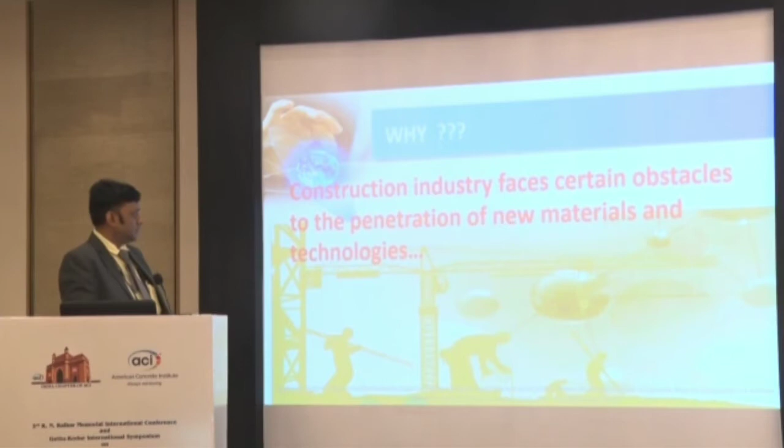This is why the construction industry faces certain obstacles to the penetration of new materials and technologies. We are finding India is 10 to 15 years lagging in utilizing advancements in concrete technology. And as the days go on, this 15 years is increasing to 20 years, 25 years.

This is a conclusion of this paper: construction works are long-term processes involving high investments accompanied by unavoidable risks inherent to research. So construction companies tend to be reluctant to use advanced materials that are not specifically listed in the official construction codes. I think we need to deal with this.

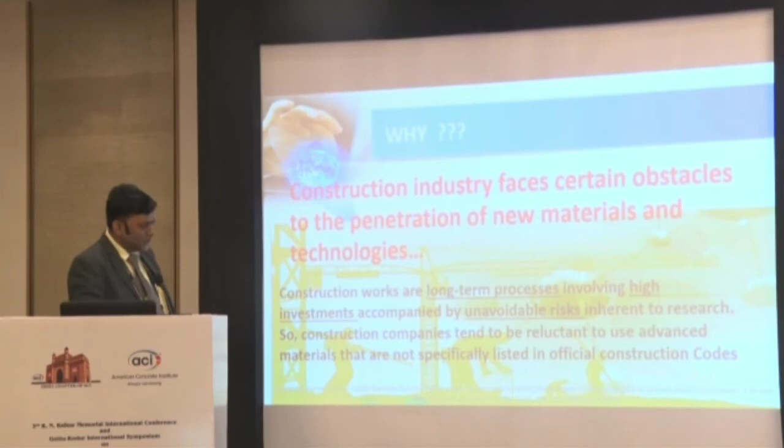Introduction: till 1930, additives were frowned or scorned upon, though many recommended it. Admixtures were developed in Japan and Germany in 1970. In India, we introduced admixtures in 1985. See the time lag.

The most significant trend of development - this is a paper of Dr. Anjan Chatterjee. OPC was there, then came blended cements like PPC, PSC, PLC, then came composite cements, and now we are in this position. Nano cement is not far behind, as stressed by some previous authors.

Scopus publications - see, it's not very legible, but it's increasing. The nanomaterial, nanotechnology and cement publications in Scopus are increasing.

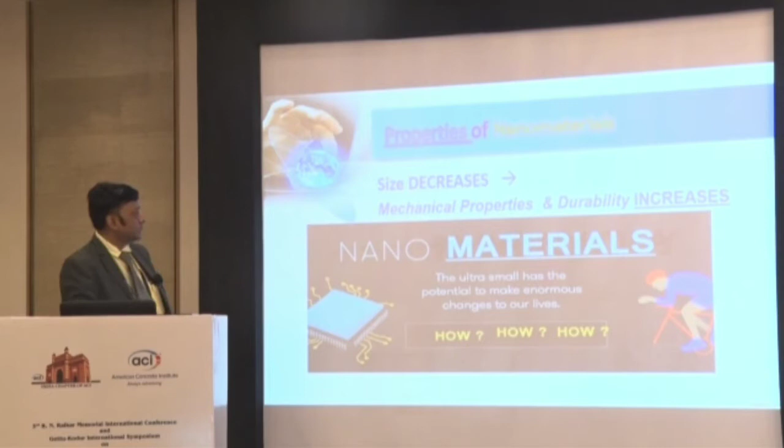As size decreases, mechanical properties and durability increase for nanomaterial properties. The ultra small has the potential to make enormous changes. How?

These nanomaterials at the nanoscale level bring different laws of physics into play - there are quantum laws of physics at play, not the Newtonian physics.

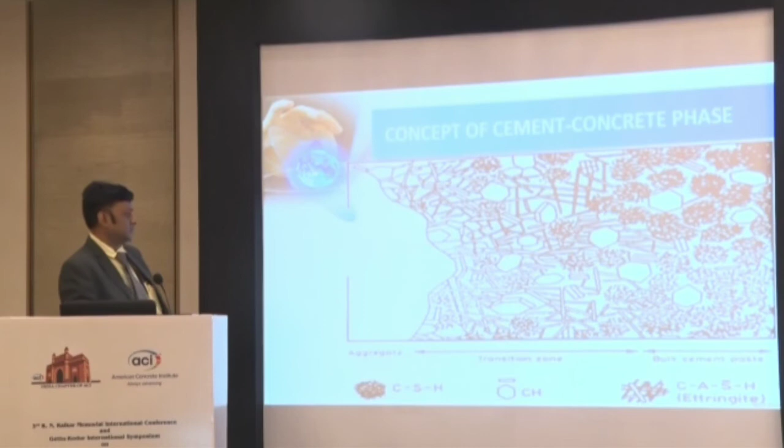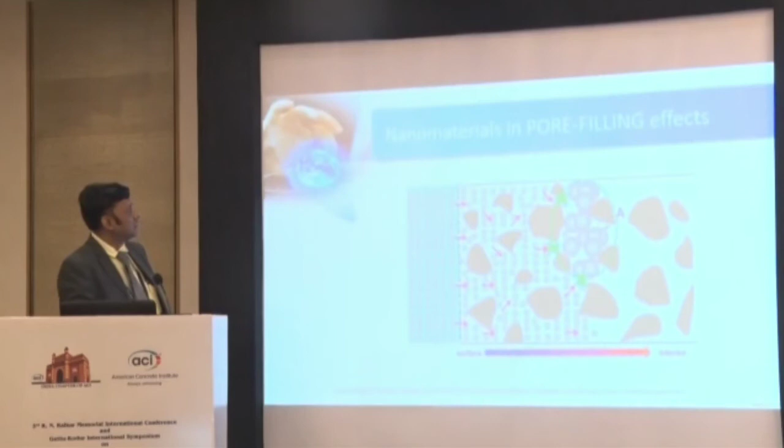This is the concept of classical cement structure: aggregates, transition zone, and cement paste. So at the nano level, nanomaterials help in pore filling and nucleation effects. This is a crack bridging mechanism.

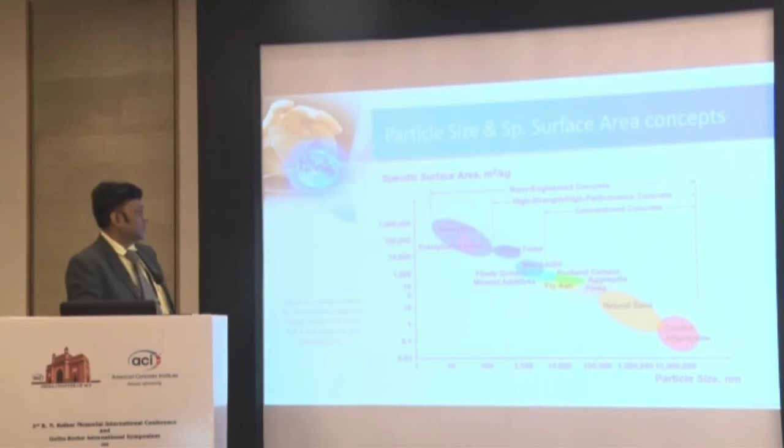So for nano-engineered concrete, we get higher strength. These are literature reviews of high performance concrete compared to conventional concrete.

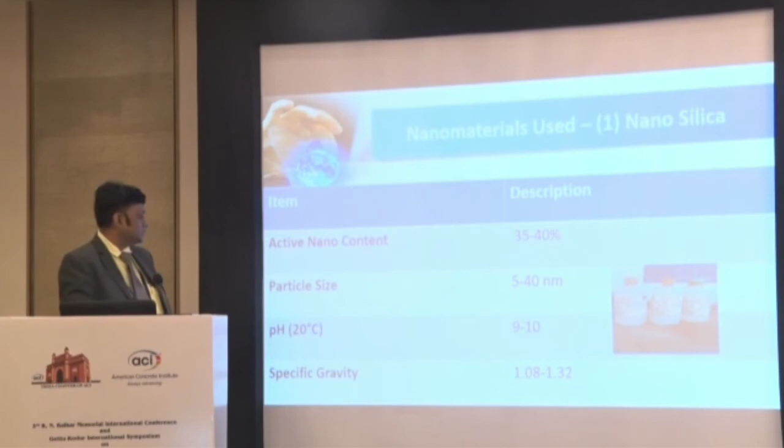I have used nanosilica from Bee Chems, 5 to 40 nanometer particle size, with this pH. I have also used carbon nanotubes from Nanoshell company, 25 to 45 nanometer length and 20 to 40 nanometer diameter.

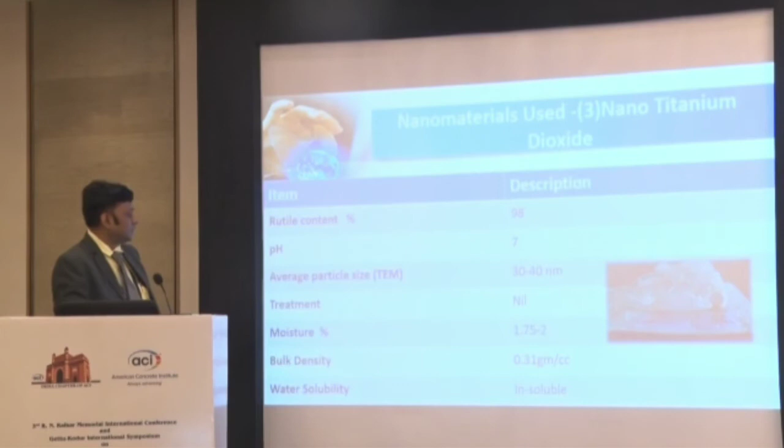These go into further details. Nano titanium from Kerala Minerals and Metals, 30 to 40 nanometer particle size. Now the physical, mineralogical, morphological study.

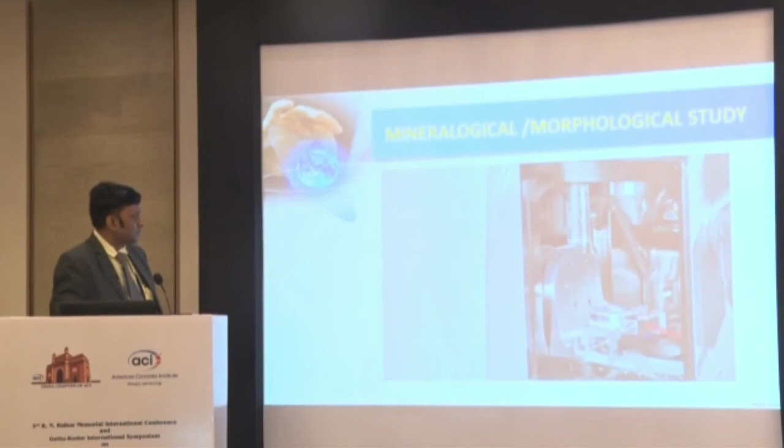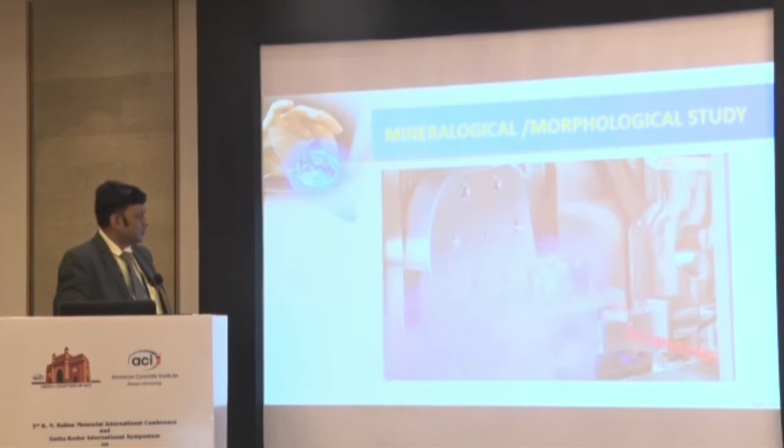This sir spoke about in the morning - I have the XRD part. The powdered nanosilica, nanotitanium dioxide, or carbon nanotube.

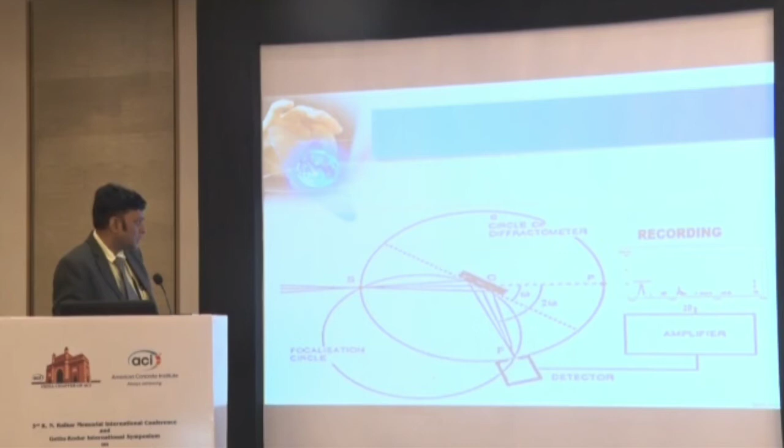Nanosilica I got in colloidal form, and I used an oven to make it into powder. The diffraction XRD for nanosilica, nanotitanium dioxide, and carbon nanotube - this is the diffraction pattern I am getting.

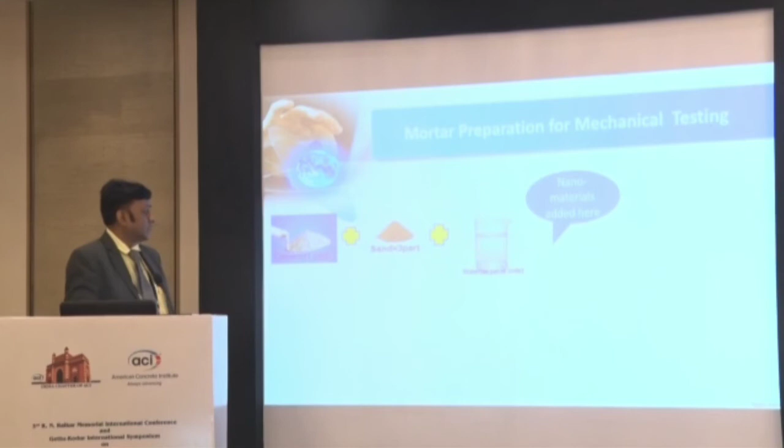For mortar preparation for mechanical testing: cement one part, sand three parts as per IS codes, plus water as per IS codes, and nanomaterials added at this time. It cannot be dissolved in water, so I added it in a different fashion - I am going to show you that.

We prepared the mortar, cured it, and tested it in the lab. Now how do nanomaterials work? Nanomaterials are like jute-like fibers entangled, which cannot be dispersed due to van der Waals force. But this is not for nanosilica - I got that as a colloidal liquid form.

We are adding PC fourth generation admixture to get workability and for nucleation. We used an external ultrasonicator to get this result.

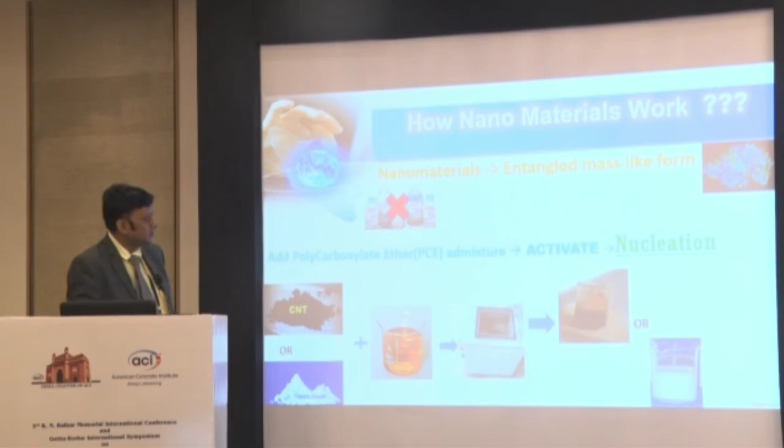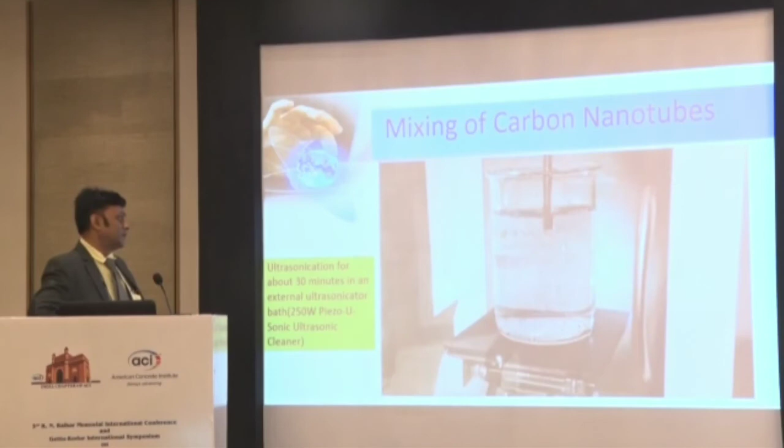Now this is a video showing how CNT does not dissolve in water. People get a problem here - they think adding CNT to cement will give you strength, or adding titanium dioxide to cement, or adding nanosilica in powder form, but this is a great problem.

So we used ultrasonication for 30 minutes in an external ultrasonicator in our IIST lab, a 250 watt piezo U-sonic ultrasonic cleaner. This helps in breaking the bonds by ultrasonic energy, external, not internal.

See how it dissolves.

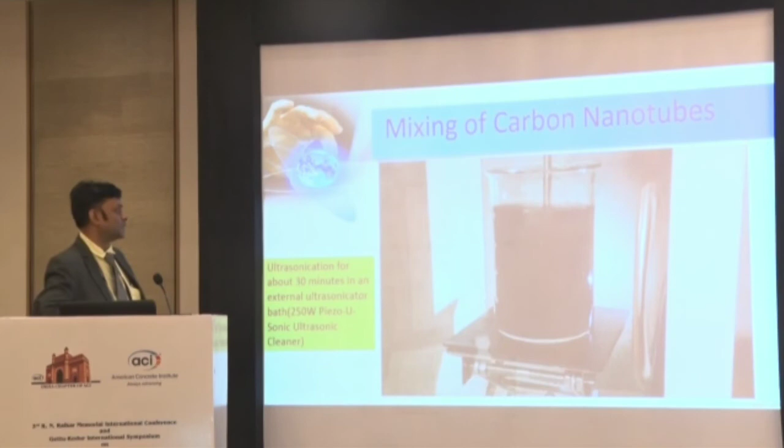It really helps in getting things done, in the learning process. Learning and application - mechanical testing of cement mortar samples. I've tested lab pictures, checked results. Now optimization of nanomaterials: what is the exact dosage of nanomaterials which gives you strength as per IS codes, at 28 days?

This is my control sample, this is my nanosilica addition, this is my carbon nanotube addition, and this is my nano titanium dioxide addition. See the increase in strength from the control sample to the carbon nanotube sample - that is the maximum increase. So we are saying this is optimized.

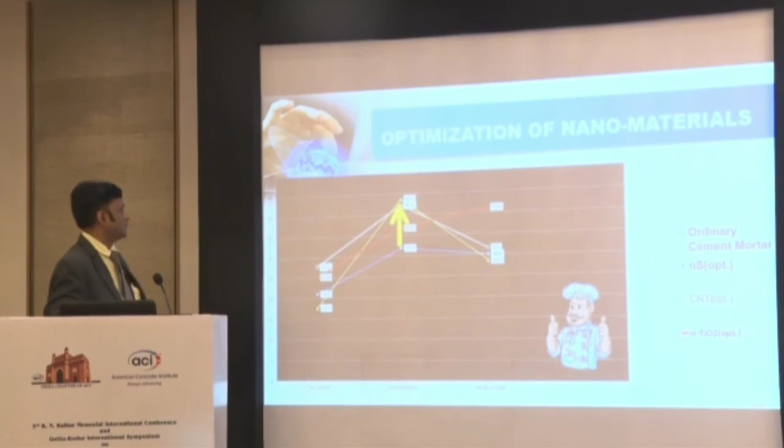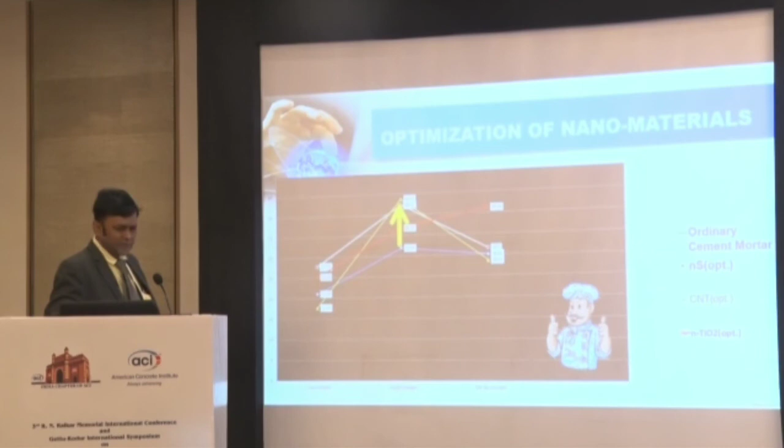I have got optimization at nanosilica 0.75% with respect to cement, carbon nanotubes at 0.02% with respect to cement, and nano titanium dioxide at 1% with respect to cement. These are verified by many literature reviews and authors, but there is also wide variation in optimizing dosages.

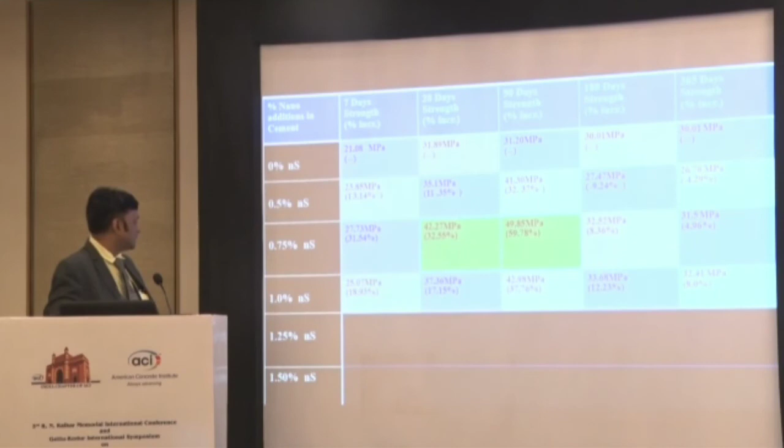These are my results for 0%, 0.5% nanosilica, 0.75% nanosilica, 1%, 1.25%, 1.5%. At 28 days I am getting a 32.55% increase - that is my optimization.

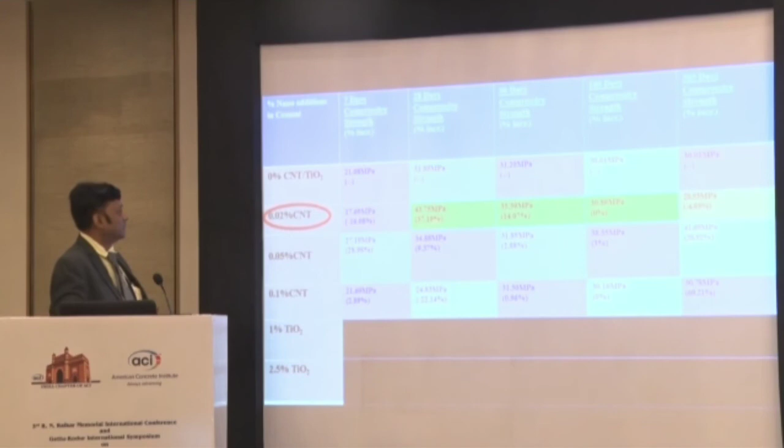For carbon nanotube: 0%, 0.2%, 0.02%, 0.05%, 0.1%. I am getting the optimization of 37.1% at 28 days. In the long term, of course, it varies, but that is not our topic today.

For TiO2: 1%, 2.5%. At 28 days, at 1% I am getting 12.6% as my maximum. So that is optimized.

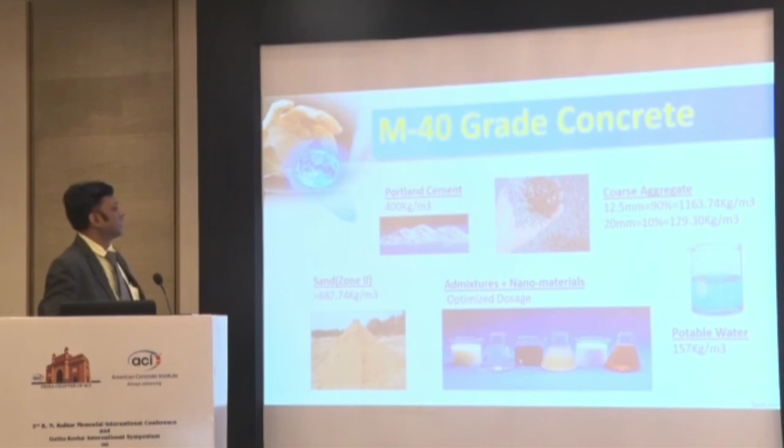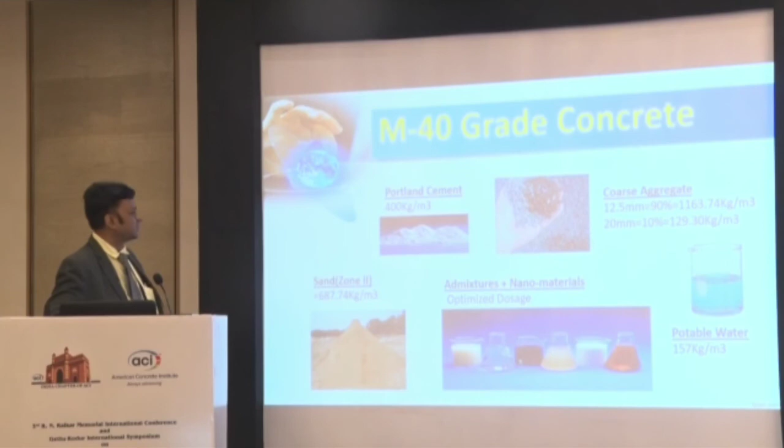Now I repeated this optimization from mortar to concrete, M40 concrete, using IS 10262. My water cement ratio kept fixed at 0.4, sand zone 2, coarse aggregate 90% and 10%, Portland cement 400 kg per meter cube, potable water as per mix design. I have got these results, so we will not go into details.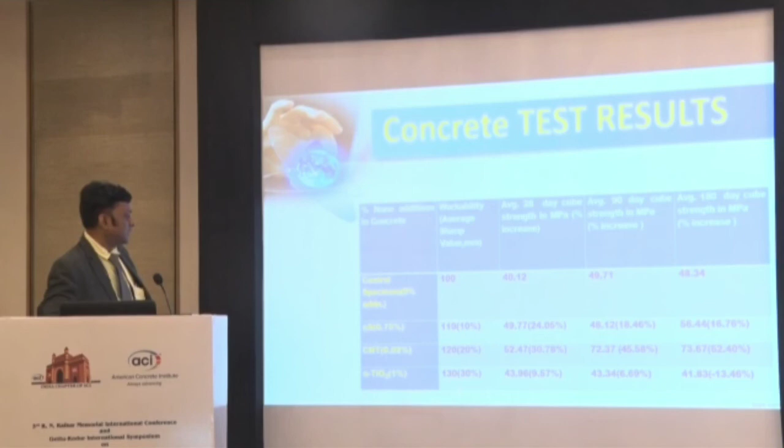What quality did I get at 28 days, 90 days, 180 days? Let's see - for 28 days this increases, and it is decreasing at 180 days. But CNT this is increasing, 52%, and TiO2 is decreasing, comparing 28 days and 180 days.

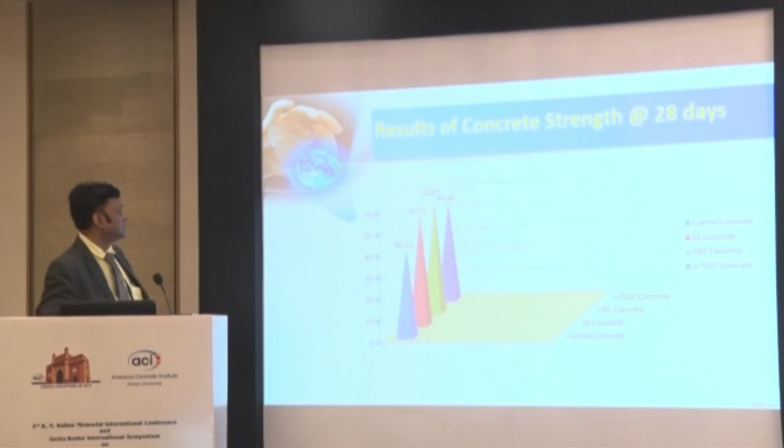So results - see the increase at 28 days. Now I am coming to 180 days - see the increase, it is increasing more at 180 days.

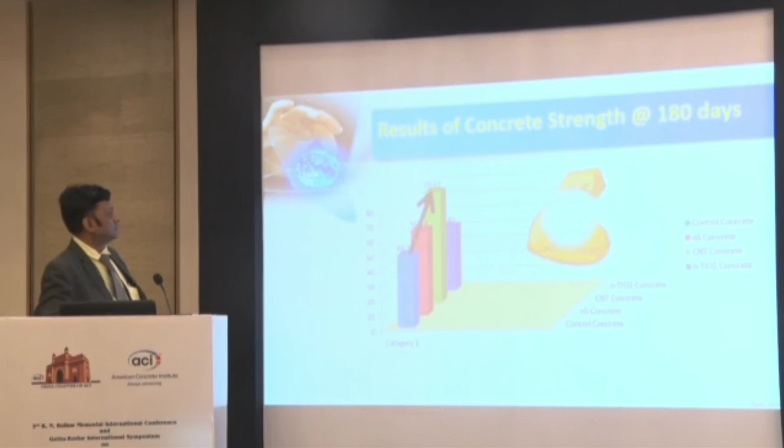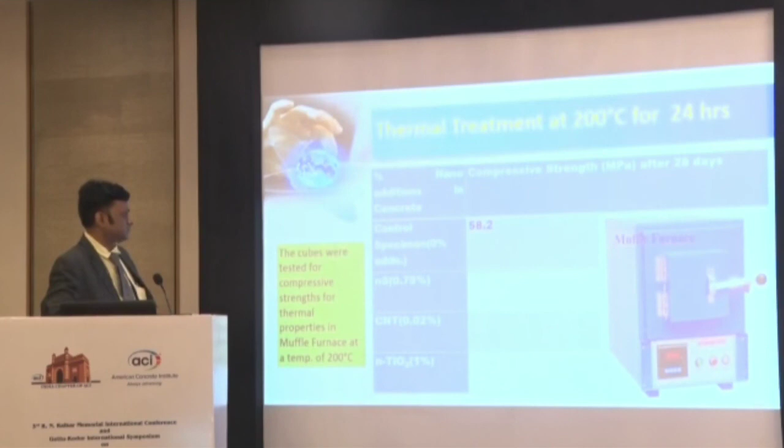The effect of temperature - I have also studied the durability effect of temperature on concrete, and I have got these results. Cubes were tested for compressive strength for thermal properties in a muffle furnace at a temperature of 200 degrees centigrade. This has increased - CNT is also leading here.

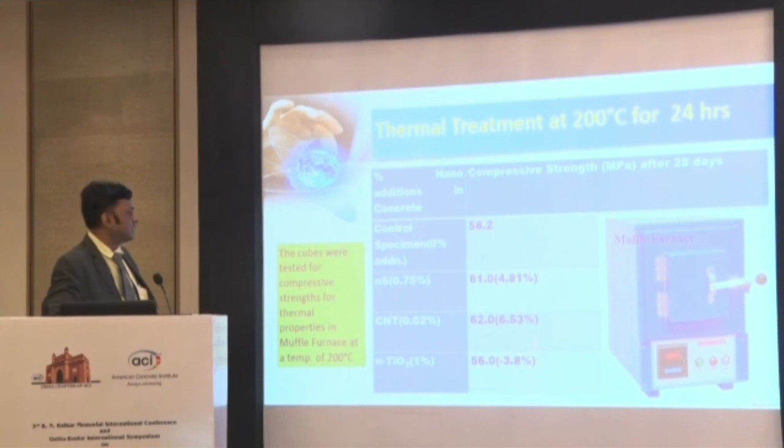When you plot the graph, this is from the reference - this much percent is the increase.

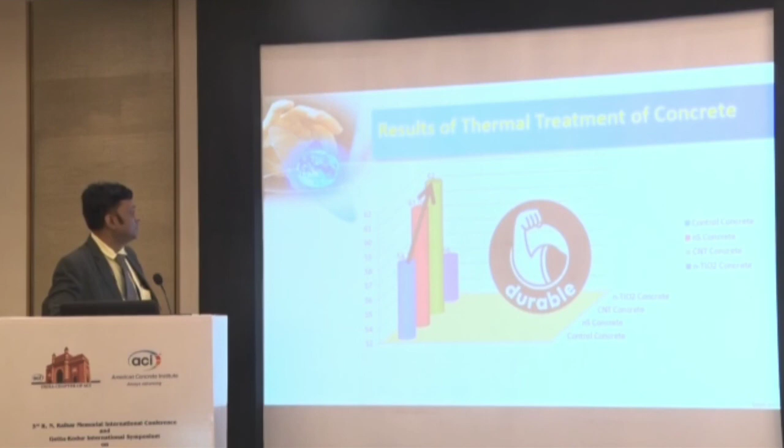Durable, more durable. Now conclusion: the optimization I have got, as I said earlier, for cement concrete - from results it is observed that nanoparticles are compatible and improve mechanical properties both short and long term, and thermal properties of cement concrete, especially at 0.02% CNT, followed by 0.75% - not 0.0075, I'm sorry.